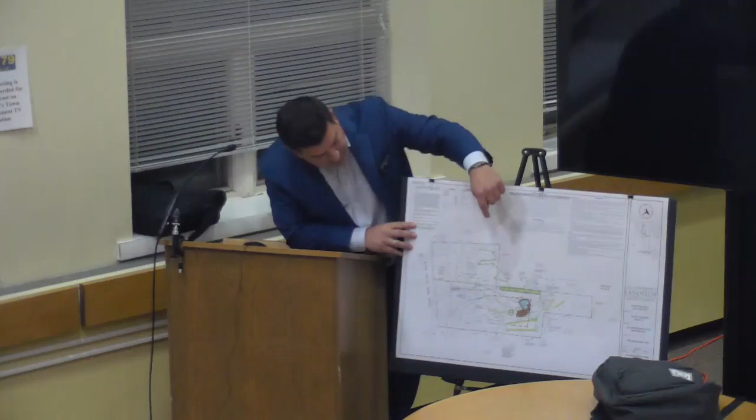So as Mr. Talamelli mentioned, this line here is the off-site wetlands. This dashed line here is the upland review area, the regulated area. Here in red, you could see that's the building setbacks. And then here in green is the existing septic. So it's a pretty robust septic system. Tank and pump chamber that gets pumped up to 4 separate galleries.

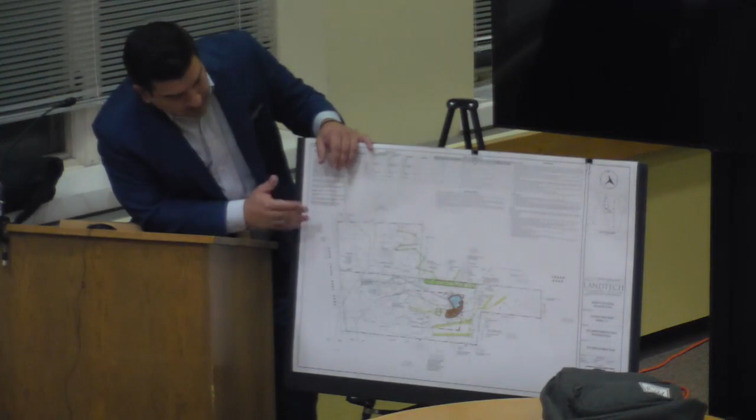So there are separating distances from septic, which is 25 feet. So this kind of is shoehorned in here, right along the building setbacks and the necessary setbacks from septic. It's a very small pool. It's a 10 by 22 pool with a spa. It's a pretty unique design, I would say.

There's a freestanding wall that kind of encircles this piece of the back edge of that pool and patio to kind of create a backdrop. It's more of an aesthetic thing. That would also allow us right behind that wall to elevate the pool equipment and kind of hide that out of sight. So just so you could see that visually.

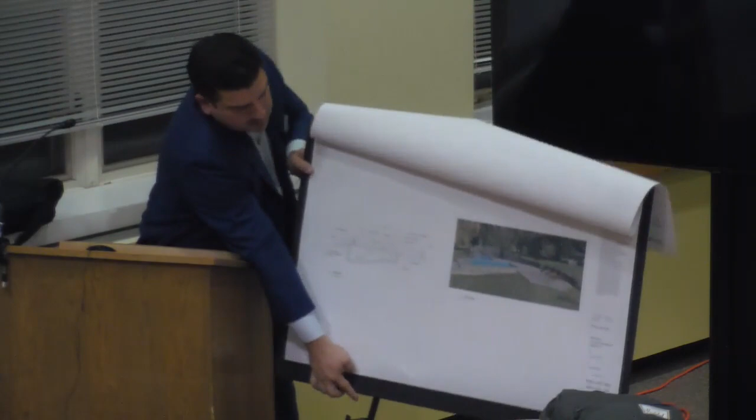There's a little rendering here that the landscape architect created. Again, pool, spa, a little water feature here, a slightly terraced patio to work with the existing grades and elevations, and again, that freestanding wall that's in the back there. It starts at 2.5 feet, and at the peak it's 5.5 feet, and it's really an aesthetic design element, but it also serves to hide that pool equipment that'll be elevated 1 foot above the base flood.

Access to the site for construction purposes. We would come off of the existing driveway. There's a little bump out here. We'd have a construction entrance. The existing drainage, which is concrete galleries, is in the vicinity that we'll traverse. We would plate that just for added protection when we come into the property. Typically concrete galleries are H20 loaded anyways, but to further protect those existing elements, we plate over that to gain access to the rear yard.

Drainage is handled by various trench drains along the patio edges, bottom of walls. You basically drain in all directions away from the pool, and we put trench drains basically around the entire perimeter to make sure we capture all that new impervious surface. That all will then get piped up here, and you can see here in blue those 6 additional concrete galleries that we're adding onto the existing system right here in the front of the house.

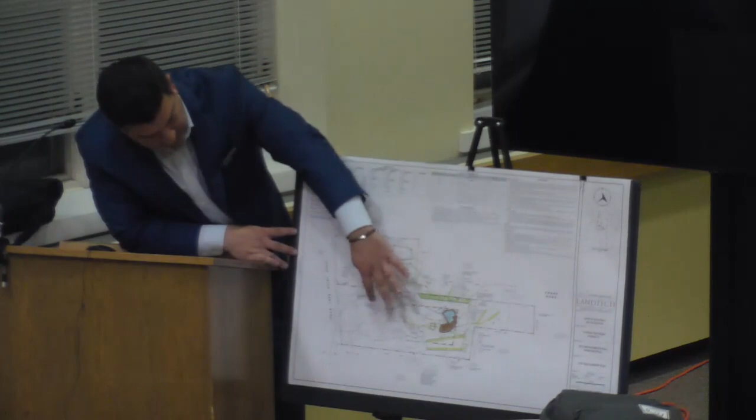All of this work is outside the regulated area, so all the water treatment, all the water handling is happening well beyond the regulated area. There is some work that's being done, obviously, within the regulated area in order to, again, what I described earlier, site the pool and its location. There really is no other location on this piece of property to site this.

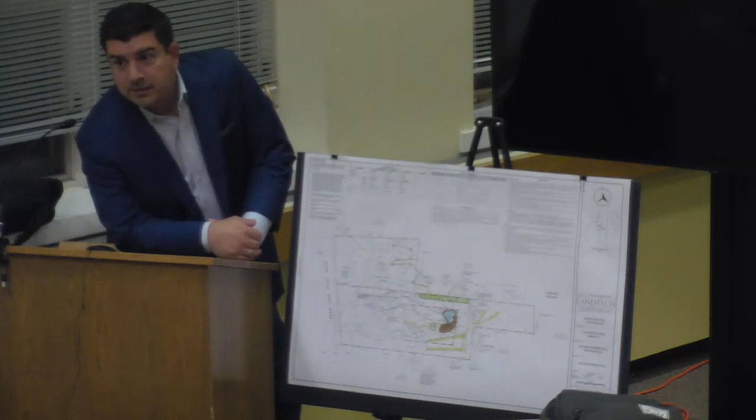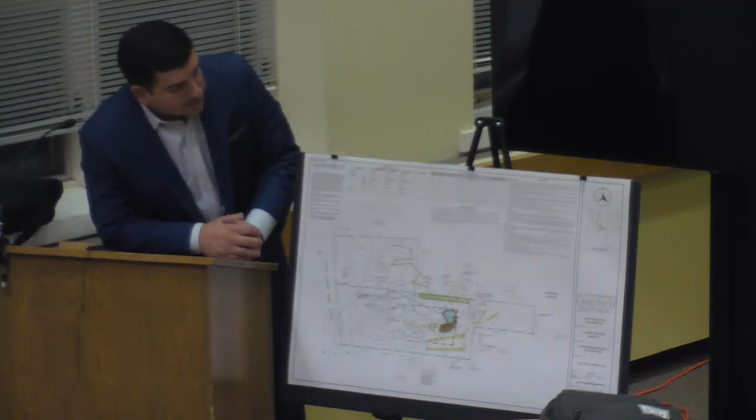And what we added here is basically a 10-foot wide buffer planting with true natives, as you guys like. I know it's kind of last minute, we originally just put in a 10-foot buffer without really calling out all the species. We then put in a plant list here of some taller shrubs and then some lower lying shrubs along that buffer. So I think we have about 31 shrubs along that buffer.

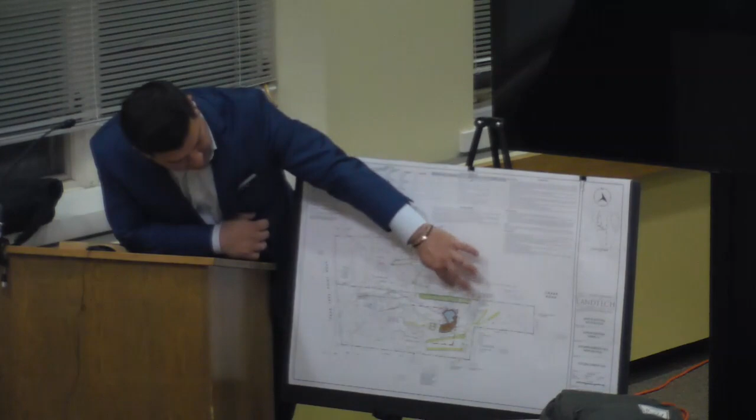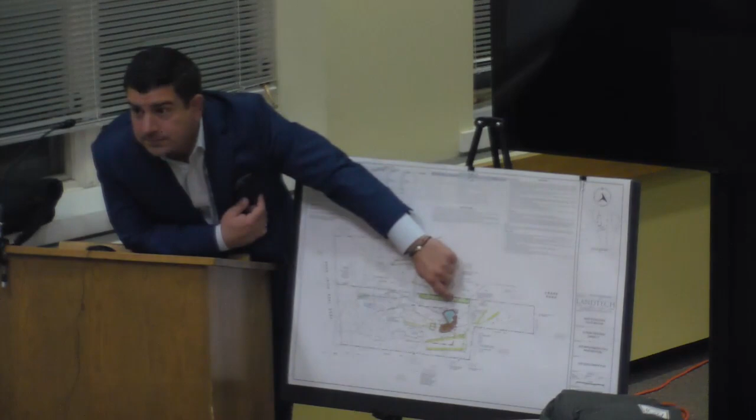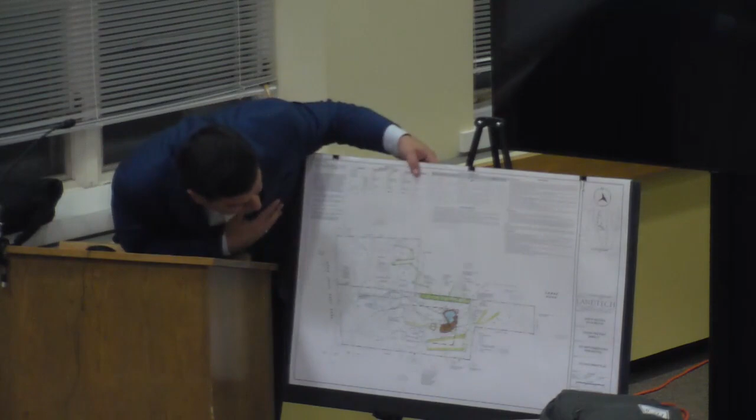This is the closest proximity to this wetlands and where our pool is, so it just makes sense. There's I think an existing willow here that we're looking to remove, and then create that planting buffer. So, again, I think they were maintaining the willow. Didn't have tree protection. Or is that a change? On the first one. That was the first plan.

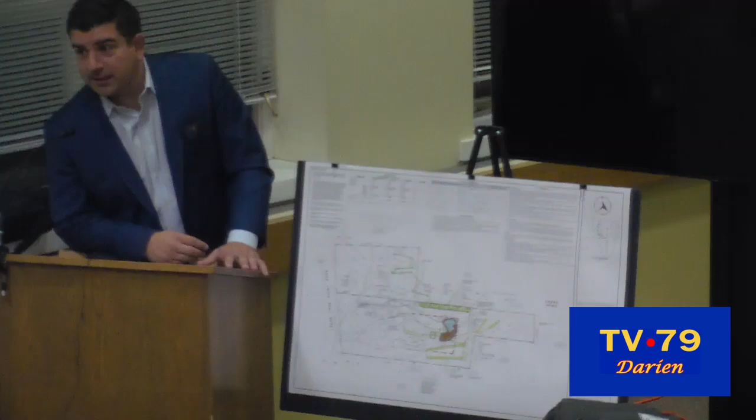The first plan, and then consulting with the LA and our environmental team, they said willows are invasive. I'm not a tree expert, but this is what I'm being told. If you want the willow to stay, I'm sure we could keep it, but they thought it doesn't have the value as a wetland planting. Again, this meets the storm requirement up to the 50-year storm, provides the necessary water quality, which is most critical adjacent to wetlands. That's pretty much it. I'm happy to answer any questions. Sure.

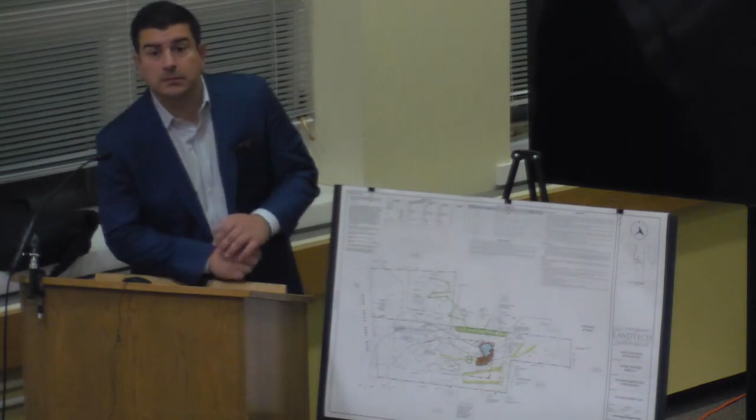Is that the existing pump chamber for the septic? Correct. Do you know approximately how close the willow tree is, I'm looking at the compass, the willow to the north of the pool? Do you know what the distance is? So our buffer is about 10 feet, and the willow's basically 10 feet off that property line.

If you're going through the whole exercise of building a new patio and a pool, I think it's more a setback issue and not a design issue. Is there a reason why you wouldn't move the pump chamber and try and bring the pool more inboard of the setback and out of the upland review area? I have a bunch of questions, but sequential questions.

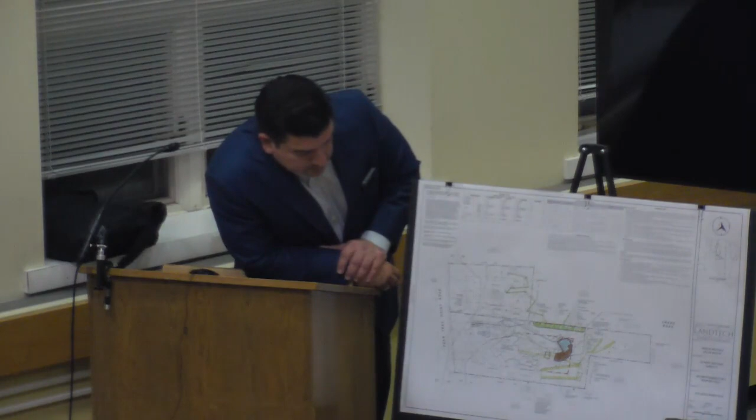So the first, just to go back, is there a reason why the pump chamber couldn't move to an alternate location? Probably not, because when you're pumping, you can kind of put a pump anywhere. Right. But the gallery is really what is also creating a pinch point there. No, I understand that. You're saying to push it closer to the house?

Further, okay, so here's the next question, looking at patterns, is wetlands flag number 1. Looking at the topography, and I haven't been to the site, I would expect that the wetlands would continue along the northerly border. Can you explain why the wetland stops the way that it's shown on the plan? Sure. So wetland flag 1 is the last field delineated wetland flag. And then we didn't continue flagging off our property.

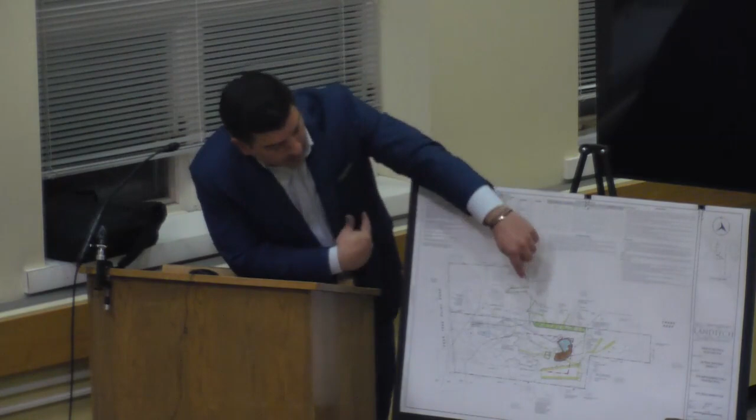No, I mean closer to the pool. Correct. So this was the last wetland flag. This was delineated in the field by a wetland soil scientist. And then there was historic mapping of wetlands in this area. The wetlands actually went just over our property line by like 5 feet. Our wetland soil scientists, when they explored, found no wetlands in that vicinity on our property. So we cut it off right at the property line.

And that's also what the GIS mapping shows. So that's where this line comes from, the town's GIS line. And it also correlates with previous wetland mappings. So the area that's shaded where the willow tree is, is that wetland? No, this is our planted buffer. I'm sorry, I used the same color, but this is a vegetated buffer. So there's no wetlands on our property anywhere.

And anecdotally, can you explain why you think that is the case? Is it topography, or is it just entirely different soils? Yeah, it's based on soil conditions. That's how they delineate where the wetlands are. Well, what I'm saying is if you have an elevated position and a depressed position, and you have wetlands abutting this area, one would quickly surmise that that's wetland, right? Right. So this area that's right on the property line is not wetland.

But I'm looking at the elevation. Can you help me out? You got a lot of stuff on this map. So I don't think we have topography off-site there.

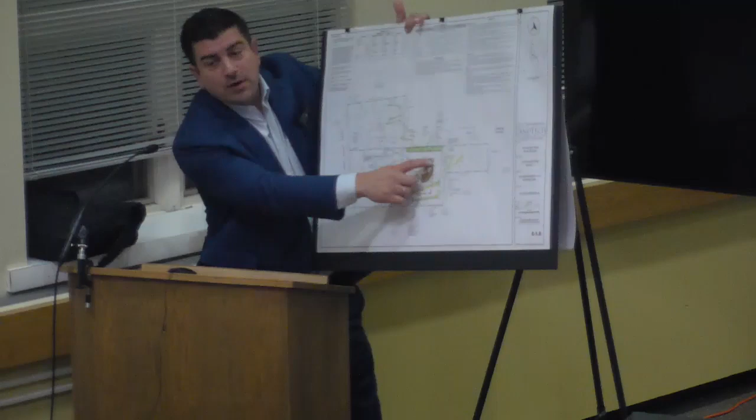Well, I think one is to relocate the pool equipment. I don't think the pool equipment needs to be located where it is on the plan. I think there's feasible alternatives. So you have to get back to us on that one. Sure, okay. We could look at that and see where we could put it. The nice part of the aesthetic design, EPC aside, was that this wall acts as the backdrop and the pool equipment is screened.

You can put it maybe somewhere in here in between these two galleries, but now it's hanging out on a pedestal in the middle of your yard. Not the most sightly thing, not in the best location, right? Well, we don't get to decide where the upland review area lives, right? Completely understand. And you guys try and make everything pretty. We're trying to balance multiple things. So I get it.

So, are there prudent feasible alternatives? Maybe the pool doesn't, right? I didn't kill you on the pool. So maybe you noodle on the location of the spa and the pool equipment, some buffer between the actual pool, so that we have more plants and less manicured lawn between the abutting wetland and the willow tree in that area. And we want to keep the willow? Of course. Okay. All right.

A quick question about the pool equipment. It's sitting on the ground? No, it's actually affixed to the wall, so there's no impact in my mind. I can provide a detail. Could you just briefly describe how it's situated? Sure. So this is the wall of the pool, the backdrop. There'll be brackets that come off of it, and the pool equipment sits on top of the brackets. Correct. So it's not on the ground?

No, it needs to be elevated. So it's basically taking up space in the upland review area, but it's not on the ground, it's not impacting it? Right, we're not pouring a concrete pad to put it in. It's affixed to the wall, cantilevered off the wall, sitting on the back of this. So there's not an impact in my mind. That does make a difference to me.

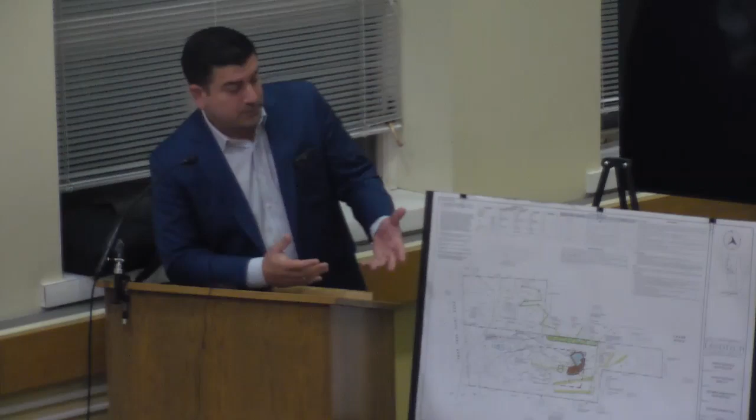We encourage our clients to look at many options, like abandoning septic and going on sewer, right? Well, that's a huge cost to this project, and I'm building a very small, very modest pool. We talk about all these elements, trust me, and then we land on something that we think we can defend and mitigate. In a pool and spa situation like this, there's not many contaminants running off a pool and spa in terms of stormwater and water quality.

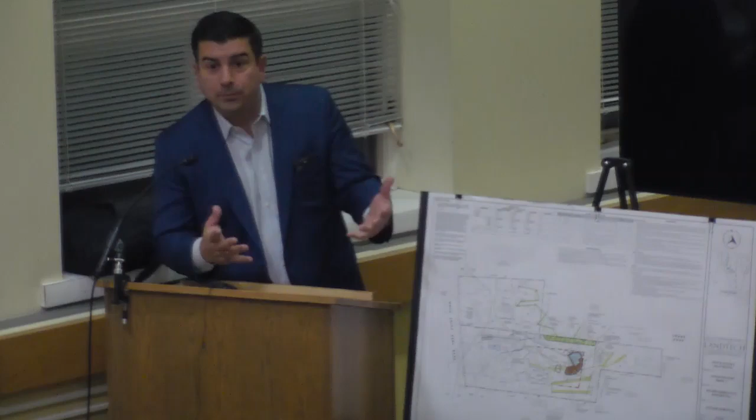You have manicured lawn right up to the wetland there. We're creating a buffer, so we're enhancing what's currently there. Could we certainly enhance the buffer more? For sure. And we could look at other options and go back to the client with all this feedback, and then make a decision on how we proceed. So we appreciate the input. Okay, thank you.

What's the sense of the commission? Peter, should we keep this application open? No, I think we can see a way forward to start drafting a resolution, in my opinion, and then incorporate some of the ideas that Mike was mentioning, also Carolyn. I think there's a route through this. It's my opinion. I agree with Peter.

Okay. My only thought is, if you want to see and have the ability to comment on the planting plan, and you want them to look at alternatives, you don't condition that away with a resolution. If you want to see it, then see it, and have them grant an extension and come back at the next meeting. If it was just the planting plan, I would say you can certainly ask staff to tweak it. But you've asked questions about the location of the spa and backwash, and there's alternatives. That's the basis for your decision making.

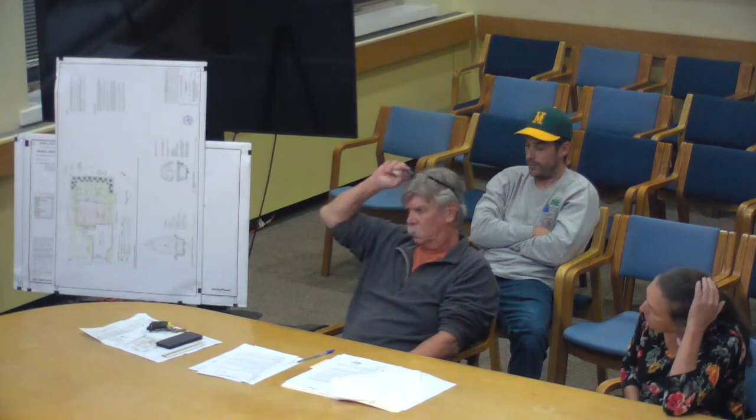Also, this morning I sent to you, we've had discussions with some of the abutters who have expressed their concern about drainage, and they have provided videos, I think you at least got some of them, showing what they experience on their property in storms of magnitude. They're, I believe, mostly to the east of this site. So I'm available for questions. The applicant's here to make a presentation. I note that the abutters are here this evening as well to express their concerns, and we can move from there.

Okay, just a point of order. The applicant's going to have a chance to speak now and present his plan. The commission members are going to have their chance to ask questions and comment and have the applicant respond. Then I'll have Joe come up and make his comments, and the applicant will be able to respond. And then I'll get to the members of the public, okay? And you'll have as much chance as you need to speak. Okay, so that'll be the order of business here.

So is the representative for the applicant here? Right here. For the record, Jay. Is there any way you could get up there and speak? Sure. Because the microphones are up there, that's the reason. Okay.

For the record, Jay Fain from Jay Fain and Associates, Environmental Consulting Services. Just a little bit of my background. I'm a professional soil scientist. I'm a certified professional in erosion and sediment control. I'm a certified ecological restoration practitioner. I've been in business and practicing for approximately 40 years.

So Rick and I are about to start at the same young age together.

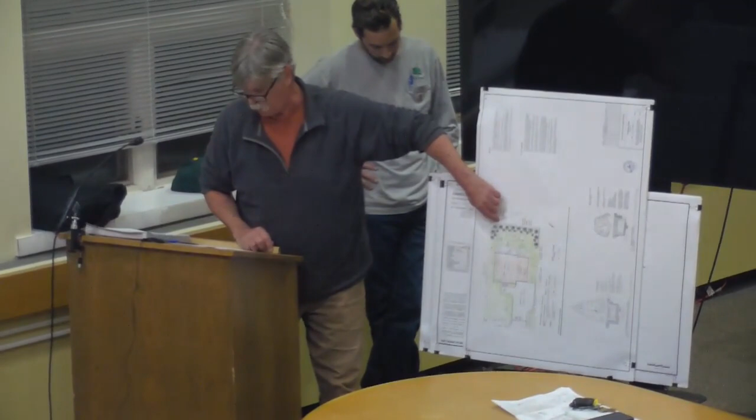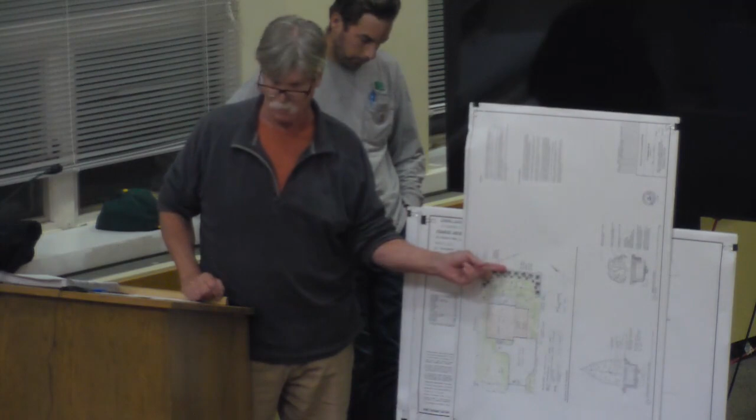The wetland in question is a watercourse that traverses the rear of the property here. It's an intermittent watercourse because it flows more than a single storm event, and it has defined banks and channel. It has evidence of scour and erosion. Really, no wetland vegetation that I noticed. It's mostly lawn, and there's invasive species associated with it. The location is approximate that I use from town GIS maps because it's off the site.

I did want to address, and Rick and I had some discussion about, the watercourse feature on the 30 Relihan property. I looked at that when I did my original delineation. It's obviously altered. I could not make a determination when I was on the property looking at it. There was no watercourse feature that I could tell. Also, I can't tell from off-site if there's wetland soils, but this area did appear to be disturbed. There is riprap placed in here, a lot of invasive type species, so I wasn't able to make a determination from the information I had from off-site whether it's a regulated area or not.

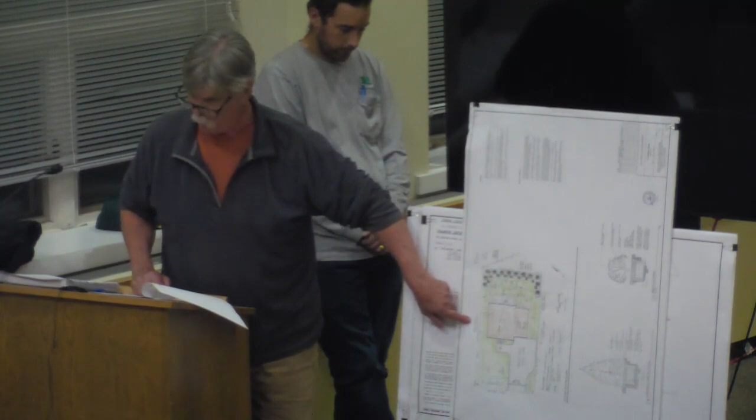I did notice that it was on your town GIS mapping, and I did go to the 30 Relihan file for it. It's interesting. It's shown as a regulated wetland and watercourse, but when I looked at it closely, there's no soil scientist report on file. There's no evidence of who determined or how they determined that this was a regulated area on this particular piece of property.

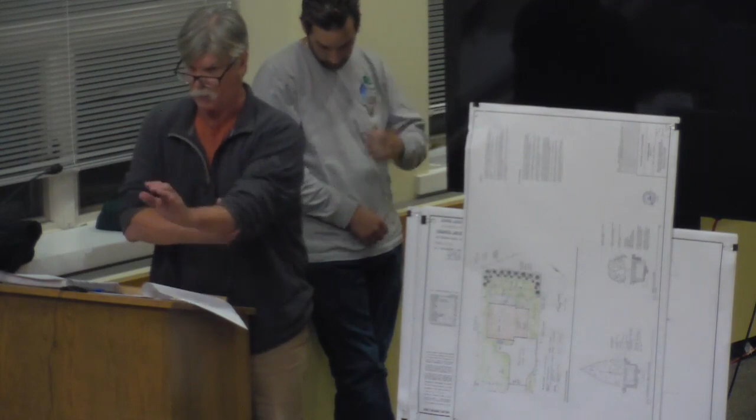Jay? Yes. Excuse me, when I walked there was a headwall, there was a pipe. It looked like most of the water was coming out of a pipe. There's definitely a drainage easement over here, and there's definitely drainage that comes across here, and I think that's the original source of the water here. And I don't think there's any dispute that it's a drainage course. And I don't even know there's a dispute that it's a regulated area. I'm just telling you that I, as a professional, can't make that determination. Okay. I don't have enough information.

And I did try, based on the information that I could ascertain, and I could not find an original soils report or anything that a professional had done. So I feel that I can't make the determination and say this is a watercourse. I feel the record needs to accurately reflect the findings that I find, and so I think it's up to the commission to make the determination whether this is a wetland or a watercourse. It does not make a difference. Regardless, we're not going to have an impact on this area here. But I'm a stickler for doing things the correct way. I want to have the record the right way in case there's any appeal or anything else.

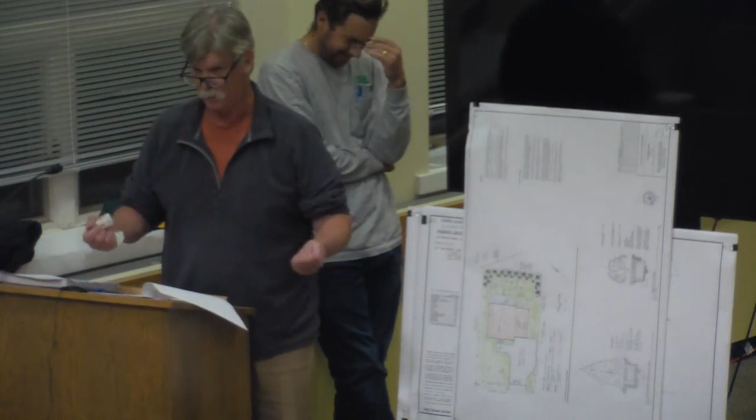So, Rick and I had a discussion about this, a little heated, but I said, let you guys make the decision. That's the right way it should be. That's the way these hearings were designed to be. I'm fine with it. Once you make a determination, we'll add it back to the plan. As I said, we're not going to have any impact on it anyways, and I felt the findings that pertain to 30 Relihan that allowed this house to be built should also be applied to this, because we're even farther away and we're going to have less impact.

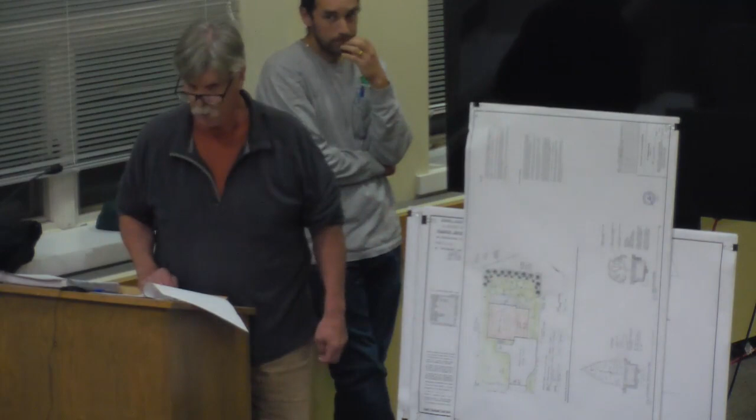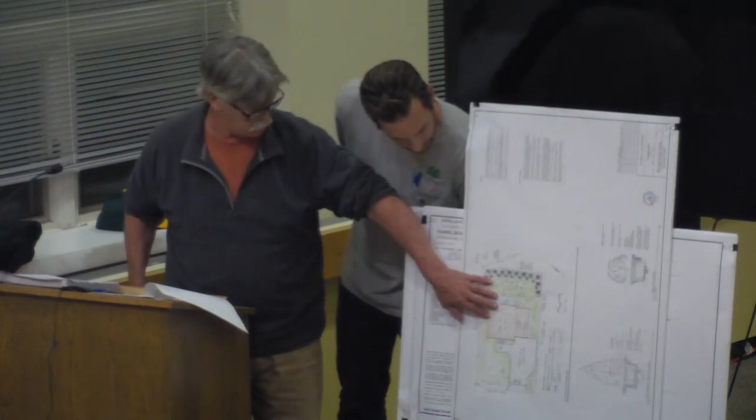Did you test the western boundary for soil along that? I tested this up here. This is what Rick calls dirt fill, what I call HTM, human transported material. Now that's kind of the updated term. It's all fill in here. And that was fairly obvious. The primary function of both these systems is stormwater conveyance. There's no real wildlife habitat value. There's no water renovation value because the water's just moving too fast through here.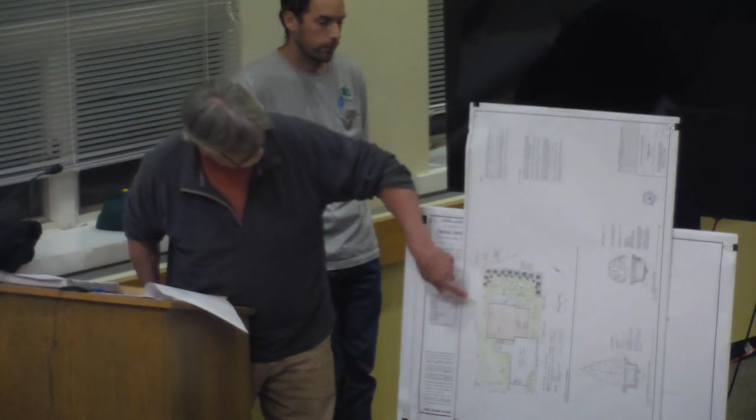I'm going to let Brian talk a little bit more about how our drainage system is designed and how that's going to renovate and improve the stormwater quality over the existing condition. But I just want to touch on that. Our philosophy is always to give back. We should always improve the situation. So we did include a planting here, and we originally used the green giant arborvitae.

The reason: we've been doing this for 40 years. We've tried everything. We tried every native conifer that we can. They don't make it anymore. The hemlocks and the white pines just can't do it anymore. We want to have a successful planting. We've had great luck with the green giant arborvitae. It's deer resistant, it's disease resistant. You can't kill them with drought. So that's why we used it.

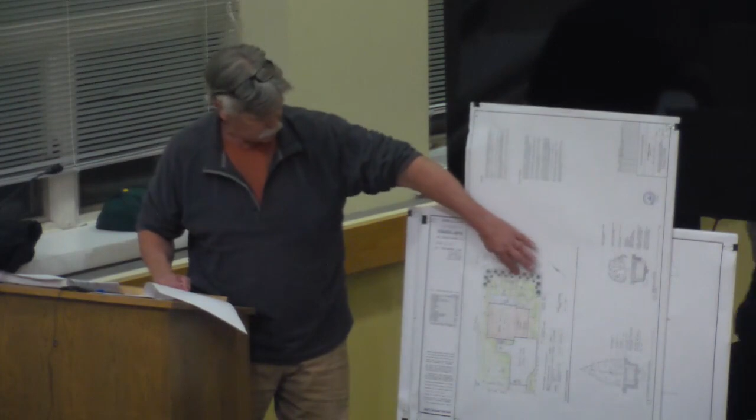It does provide cover for animals. It doesn't have any food value, but it does provide cover, similar to other evergreens. We got a comment: could we use something closer to a native? We could use whatever you want, I'm just giving you our experience. We did revise the plan and put Norway spruces here. They're not native either, but they've become indigenous. It's common, but we can have a discussion on that. We're not wed to anything, but we felt it was appropriate to have some type of evergreen buffer here, and then we used native, what was it, the clethra along the front here.

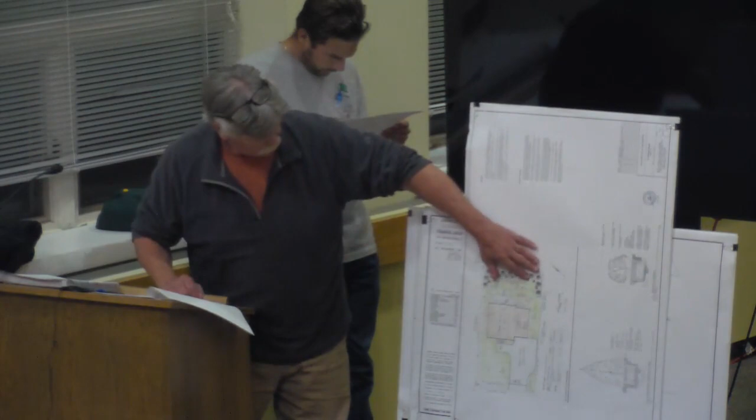Unless you have any questions for me now, I'm going to step down for Brian, because this is really a lot about drainage. I think you need to have a detailed discussion on the drainage and how that's going to be improved. And then we can digress back to any questions you have for me later on. Thank you very much.

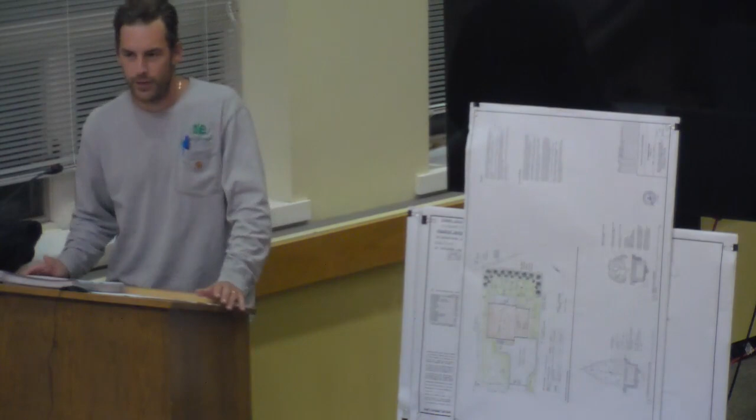Good evening, Brian Muller with Muller Engineering. I'm a licensed professional engineer in the state of Connecticut. We analyzed this site under the most current drainage regulations for the town of Darien, which is the fresh meadow approach. As Mr. Telemelli mentioned, we're increasing the impervious area on this site by approximately 700 square feet. I'm not going to say 673. It's 700 square feet; 27 square feet is de minimis. It's one of Rick's favorite words, I think, these days.

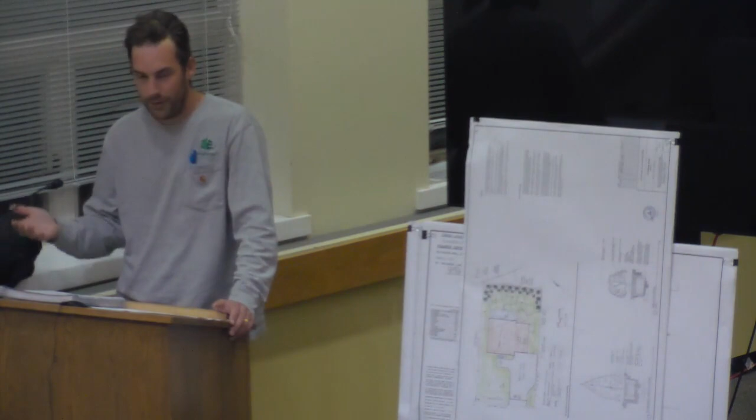But the fresh meadow approach is really a great approach. Most towns don't have that regulation besides Westport. I think that's the only other town that makes you do a fresh meadow approach. As an engineer, my vocabulary is limited, I'm good with math, but it's a good way to make up for lost time. In the past, we never required drainage systems, so by doing the fresh meadow approach, we don't take credit for those old impervious structures and paved driveways and patios. So we're making up for lost time. By that regulation, I had to analyze the site as if it was grass, not any impervious surface. And still, with the drainage structures and improvements we're making, we're reducing volumes and peak flows through the 100-year storm event. And I wanted to do that specifically here because of this intermittent watercourse.

When we were out there testing, as Jay mentioned, it was hard to determine over here, because when you look to the north property there, number 30, all you see is riprap. You see a bunch of riprap thrown in there, and I think somebody probably did that after this permit was granted and the CO was granted, to help sediment and erosion, because I'm sure this pipe flows water. I saw the videos, so it's definitely some type of conveyance for a large watershed that rips water through here when we get those 6-inch rainstorms in a couple hours, which is a big problem these days.

As you saw in North Carolina recently, they got 30 inches of rain. Towns were literally gone. And that's sadly the storm events we're coming up with now. So eventually I think the peak flow models that we run are going to change for more intense storms. Right now we run it over a 24-hour period, and a 25-year storm event for the town of Darien is 6.4 inches in 24 hours. So when you get 6 inches in 3, 4, 5 hours, that's a lot of water. And this year we've had a couple of those storms. In certain areas, it's amazing. You'll get 4 inches in Greenwich, you'll get 10 in Darien.

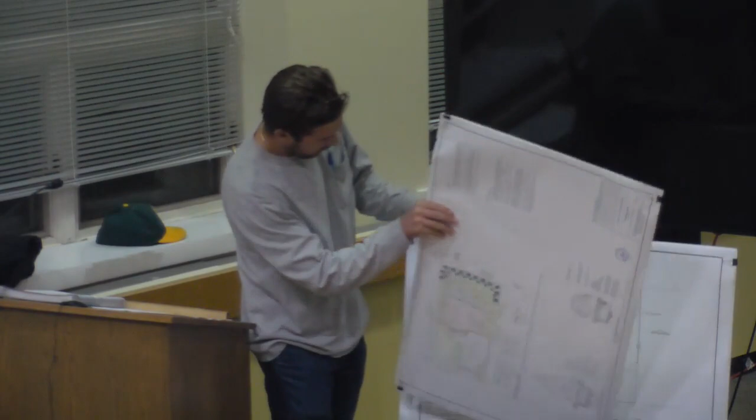So what we have right now is just 2 Cultec systems, one in the front, one in the back. The front one takes the driveway, and the back one takes the back portion of the house. So the majority of the house goes into the back, and the whole driveway goes into the trench drain here. So we'll capture the whole driveway. There's curbing on the driveway. And then we did, just as a precautionary thing, because when we dug test holes, we didn't witness any actual groundwater in the holes.

How deep did you go? We went about 9 feet, actually, in the test hole. I think I only recorded like 7 feet down because the basement's only 5 feet into grade. We also tried to keep the first floor as elevated as we could, so we only had to excavate 5 feet.

Are you putting mechanicals down there? Not that I know of. Not in the basement? Not that I know they're putting mechanicals down there. So what's gonna be down there, then? I'm sure they'll have a hot water heater down there. I'm sure that's probably where they're gonna put it. That's where I would put it if I was building the house. But I didn't see a labeled mechanical room on the foundation plan. It was just a basic foundation plan, open floor plan down there in the basement. Since you have it, you have sump pumps, et cetera?

Yeah, there'll be a sump pump inside the basement, so it'll be different than 30, where they have 2 exterior pumps, and on 30 those exterior pumps just go to a level spreader, so there's no real storage there. So when those pumps go off, they're basically just gonna flow right into this intermittent water course. We have 2 330 Cultec systems there that'll store 100 cubic feet of water each, and also provide infiltration, which is another thing in our drainage model we don't account for.

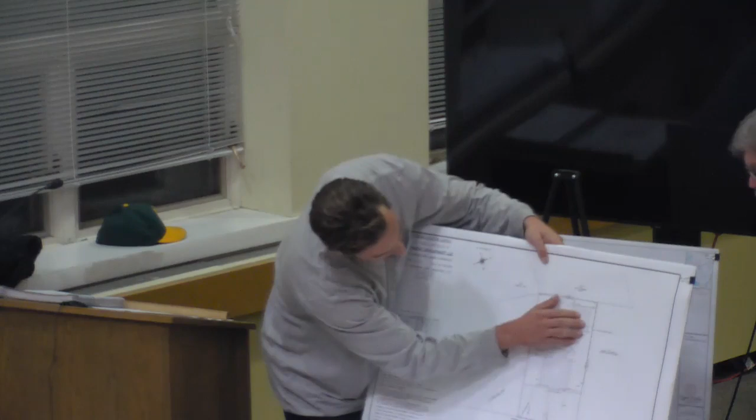There was a big detached garage about 6 feet off the back property line. The driveway went all the way back there. All this water from the high point right across the middle here went untreated down into the wetland area in the back. So now it's all going to be treated. There were minor comments from the outside reviewer, Joe. Actually probably some of the best comments I think I've ever had.

The first comment is prepare a stormwater maintenance and operations plan. And I think that comment was because he probably reviewed the first set of plans. On the second set, we have the operation and maintenance plan right here. If he wants a different type, we could do that. I do paper 8.5 by 11 documents that I like to give the homeowner because after the house is built, these maps are gone. So a little packet goes a long way. I can also provide a packet for environmentally friendly lawn care too. We do that in some towns to help tell homeowners how you can treat your lawn and get a green grass without putting Roundup on it.

One of the other comments was asking me if I investigated this easement to make sure that there were no pipes that cross underneath the property, and we did. We dug test holes right here in the line of it. We also looked at it, and it's very obvious there's a pipe that comes out. My assumption is during the process of this subdivision, they tried to run a pipe through here, and someone cheaped out and said, let's just pop it out right here and let it rip. Back when this subdivision was done, that was probably normal practice. We also didn't have heavy, intense rains back then either.

And then one of the other comments was just bringing up the groundwater thing and the sump pumps, and it says no response is required. And then the last comment was, provide inspection ports on the Cultec, and yeah, I definitely need to do that because that's an important aspect of maintaining the Cultec system. Usually I'm pretty good about that. That one slipped by me this time. So we will add those, and hopefully that addresses his comments. If there's any additional, we'll address those too.

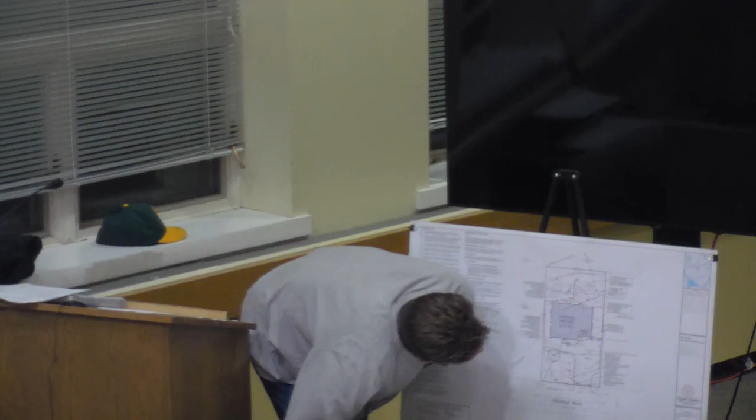The driveway is very flat. I've actually discussed with the homeowner about making it a porous asphalt driveway or some type of porous material as just an additional measure. But I wasn't gonna include that in my drainage model because I don't need to. With the driveway pitched so minimally, he will get ponding. I don't know an asphalt guy that'll pitch it that perfectly. You'll always get some ponding, and then his driveway will really degrade quickly. Instead of a 15-year driveway, it'll probably be a 5-year driveway.

But that's something this owner has actually done in the past. I've worked with him in the past. We've done a lot of porous asphalt driveways, Gravelpave2 driveways, paver driveways, a mix of the group of 3. Sometimes they'll do the parking spot as pavers, an apron in front as pavers, and then the rest porous asphalt or gravel. When we do a gravel driveway, if you Google Gravelpave2, they'll give you all these, it's like a newfound design. So it's not like you're going down to the Jersey Shore, driving a gravel driveway and you see all the tire ruts, right?

It puts down this hexagonal structural piece in the top 4 inches of gravel that gives a structural aspect to the gravel, so that you can actually plow it and not make a mess, and not plow gravel all over the place and have a large cleanup. And that's actually implemented at the town of Greenwich. If you do a gravel driveway, you have to do that.

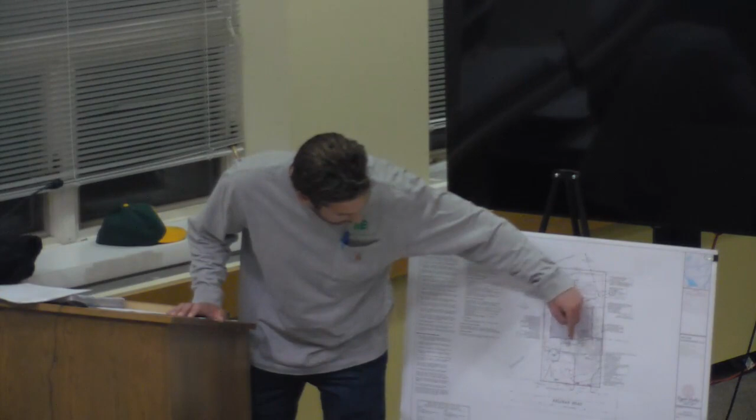So it's certainly a benefit to the abutting neighbors because you haven't increased the grade. Oh, yeah, and I purposely did that because I know there's specific rules on grading near the property lines in town. The original design of this actually had the house further forward with no parking spot here. But when we spoke with zoning, and I didn't know this until now, there's a code apparently that you have to provide at least a 2-car garage or an additional parking spot.

And they wouldn't let me count the parking spot here as an additional parking spot because it's within the setback. So we had to provide a parking spot so that 2 cars could park outside the setback, which I thought was an interesting regulation.

So that's how we came up with what we came up with. Originally, we had this whole thing forward another 10 feet, but we added that spot in there. And then my last question is, I know you engineers design everything. Would it be belt and suspenders if you took the front left gutter leader and, I don't know, if you just put 2 more Cultecs where the driveway Cultecs are? It's just a question if that would be meaningful or not.

I know just for the commissioners, Mr. Devanzo, if we ever looked at all of his plans when he was presenting applications that had upland review area review, he would always grab a corner of the building and just put 2 Cultecs to take some additional runoff, which is like the nice to have. So that's my question: is it prudent or is it just a nice to have, is it eyewash?

Well, here's another point, just forget that I even asked the question: that's the area where the abutting neighbor has the scour from the pipe, so you don't necessarily want to add more water. You're doing them a favor by not adding infiltration in that front yard area. Yeah, exactly. I was trying to maintain a natural grade over here as well, even though it is deemed as fill by the soil scientists. It was still placed there 50 years ago, so to me now it's natural, it's older than me.

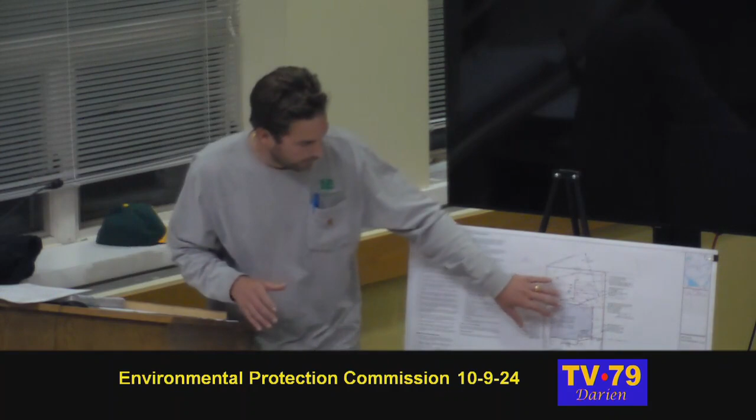But I did think that I could always shift these Cultecs over too, to eliminate any excavation as close to this wetland area as possible. But I like to keep a 10-foot separation between different Cultec systems because they tend to mix. And if one is groundwater and one is stormwater, you like to keep those separate. And that actually gives me another idea.

A lot of people are always worried about sump pumps and the impacts on brooks and watercourses and town pipes and things, right? So in a normal situation, when you're actually pumping groundwater, your sump pump should go off days after the storm because it takes time for that rainwater to absorb down into the groundwater level. I tell people this all the time because I get calls after a big rain: I got 3 feet of water in my basement, it's never happened before, or my sump pumps were going off all night during the rain.

And usually what I tell people is if your sump pumps are going off more than normal during a rain event, you have problems around your foundation, where stormwater is infiltrating down into your footing drains faster than it should. Most of the time that's either somebody's patio that's settled along the foundation and it's back pitched a little bit, or you get some puddling, or your gutters are clogged and overflowing right next to the foundation, adding water that goes down into your footing drains.

So a lot of times a normal groundwater system with a pump should be pumping a day or two after the rain event, which in normal situations, after this intermittent watercourse flows like crazy during a 6-inch rainstorm, the pump shouldn't really kick on until the next day when this water's already starting to recede.

So typically, I've actually had arguments with DEP when I did work along the Delaware River. Delaware River peaks like 5 days after a rain event in certain areas. So they actually let us just provide water quality storage so that we could get the water out before the flooding actually happened to the peak of the river. So I thought that was interesting because we provided a lot of storage and he said, no, I only want you to provide this much. And he explained that to me and it makes a lot of sense. You want to get the water out to the river, down to the ocean before it peaks because you're just then affecting that flow, right?

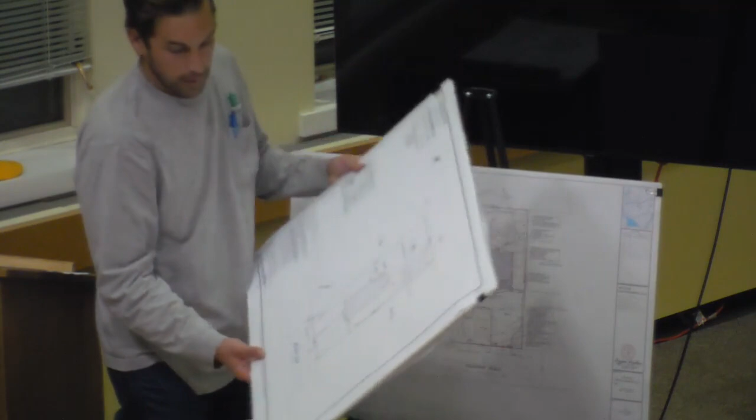So on this survey, basically, when this water flows down here, it all just flows right there. It didn't go this way, it didn't go along the well, garage. Yeah, that's how I would see it. So if that's the case, then why is the big Cultec on the right side and the small one on the left side? And why is your drain not at the low point? So I'm gonna hold those questions until we have the neighbor talk about what they see. Okay. Yeah. I can answer that really quick.

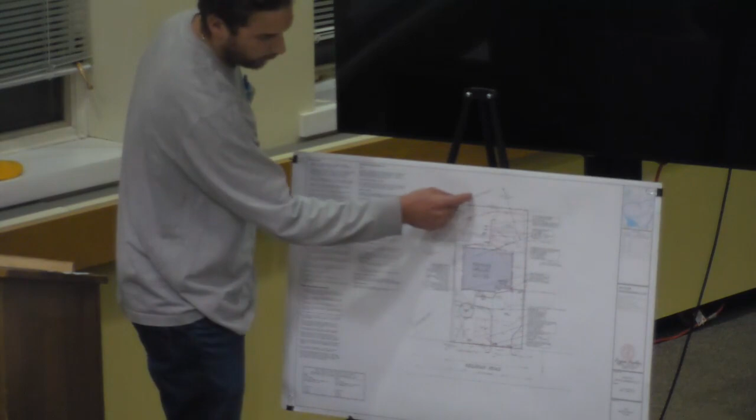Sure. So the reason why we wanted the Cultec, at least the one that I think will overflow during a rain event, as far from this low area as possible, is because then when it overflows from this standpipe, it gives it more chance to flow over land in a sheet flow manner. And ideally, that gives it one last chance to try to infiltrate the ground. It also will slow it down. If I put this right over here, then immediately the water that overflowed out of there, if it ever did, would then be right in that watercourse with that heavy flow potentially, depending on the rain event. So the further away I can get from a point of concern, the better. It allows the water to sheet flow over land.

Just like if you have a steep property and once that water hits that top ridge, it's gonna start to rip down the hill. You can actually extend the time of concentration by leveling it out and building a wall, and you'll actually reduce the flow of water to that bottom of the hill by leveling it out, because then it flows over a smaller pitch and it takes more time for it to hit that point of concern.

I don't know if that makes sense. Okay, I might go through that again another time. That's fine, that's fine. Okay, I'm gonna go through it again. I'll pass it on.

This is the most informative presentation I've heard in many, many moons on this commission from all of the presenters. Michael's good questions. I have nothing to add. I'm thrilled with the education I'm getting tonight.

I apologize for asking you to repeat, but could you just repeat? I was looking for a document here, and I kind of tuned in as you were talking, but I missed what you said initially. The driveway is constructed of? Asphalt, as of right now, it's just a normal asphalt driveway. Because you were talking about the stone driveways. Yeah, so knowing this builder, it could change over time. They build it, and then they're gonna list it, and depending on the new homeowner, they may want a different type of surface treatment.

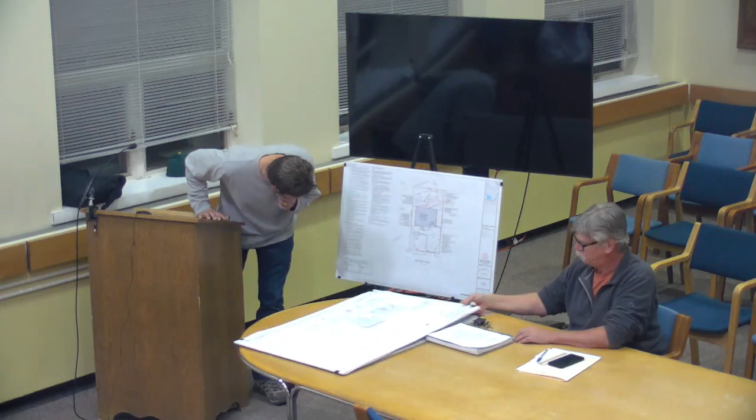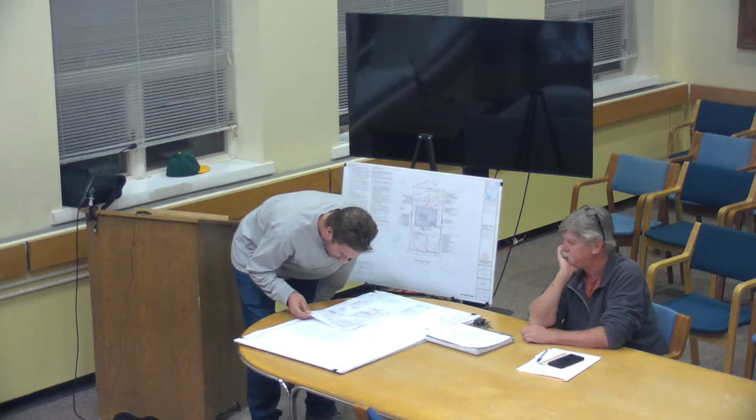It might have been on the... That's the 30 row property, yeah. Oh, those are the neighbors, okay. Yeah, from 2017. All right, so there is a full basement, correct? Yes. And how tall is the basement, how deep? Let's see here. 8 feet. Yeah, it's like 8.5 feet.

And so getting back to the sump pumps, is there a sump pump in the, I know the house is kind of... It'll be inside the basement, which will be different from the neighbors. So the neighbors, they actually have a detail here on this plan on file. It actually shows the sump pump to be 2 feet below the bottom of the footing, which is very deep.

A lot of times, when we do these types of designs with exterior sump pumps, I usually have contractors put those in as soon as the foundation goes in the ground, so I can monitor the level of the pump, and we can adjust it based on how much it's pumping. Because honestly, by raising it 6 inches, it might pump half the time, and you're still 1.5 feet below your footings. You don't need to be that low. You only need to be 1 foot below your footing, really. So that could be something that could always be adjusted on properties in the future.

So just out of curiosity, if you're recalibrating the sump pump to minimize how often it's running, why have separate detention for it? I don't like to mix stormwater and groundwater, because sometimes the groundwater will be pumping at a different time. If you get a big rain event, and 2 days later your water's all down into the footings, and it's starting to pump a lot, and then it starts to rain again, you don't want the pump pumping into a system that's also gonna take rainwater, because it'll already be full. So I like to keep them separate, and a good 10 feet apart.

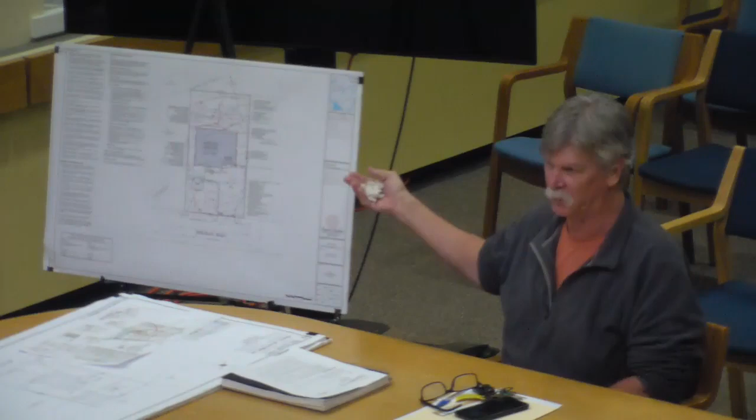Yeah, I hear you, and there's different philosophies on that. That's my expertise and my passion, invasive species control and removal and environmental restoration. So I don't want to get into the whole spiel, but we can do mechanical here. The only issue with mechanical is you can't just take it and dump it, so you have to be careful. We'll have to address that during the process. But basically, there's nothing there we're saving.

We'll just scour, take everything away, and then bring new soil in. The only problem is there are absolutely invasive species on the surrounding properties, and if you know anything about them, we're going to be challenged with them in the future. We can't go on the neighboring property.

Right, and some of them, I don't know exactly which ones are there right now. But the worst one is the knotweed. Yeah, knotweed, and that's just nasty. So we'll take whatever we can on our property. We'll encourage the neighbors to take theirs away.

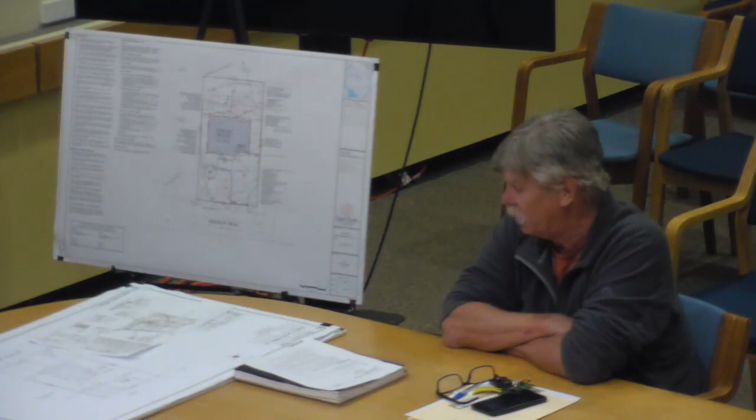Yeah, I was gonna say similarly with giving homeowners a plan or a suggestion to practice organic land care. Maybe if you give the neighbors some literature about the invasives, they would be willing to. Yeah, and like I said, we try to use native species. I'd like to get your input on that.

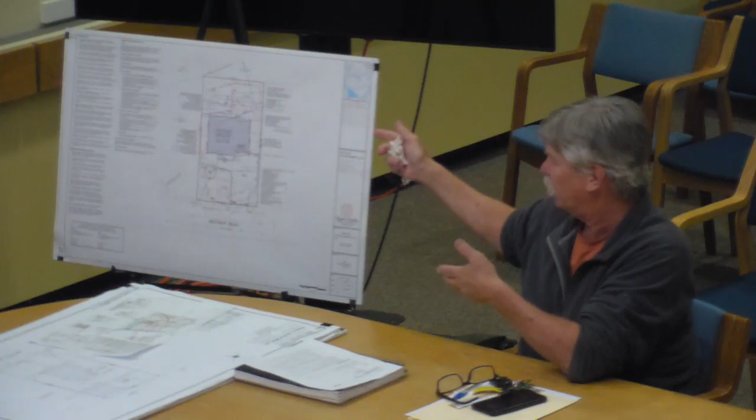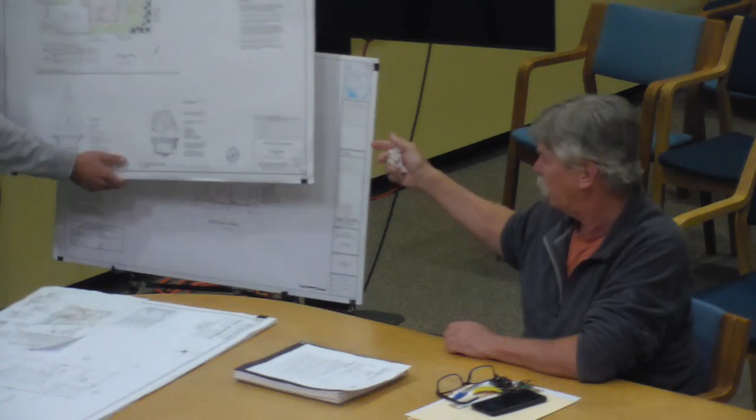We always, wherever we can, use pollinator plants and native species, and we don't even just use natives. We use the native genotype, not the cultivars. Right, the straight natives. And then for the lawn, we never use bluegrass lawns anymore. We use only the tall fescue grasses. It's low everything, low water, low maintenance; once they're established, you don't need to do much to them at all.

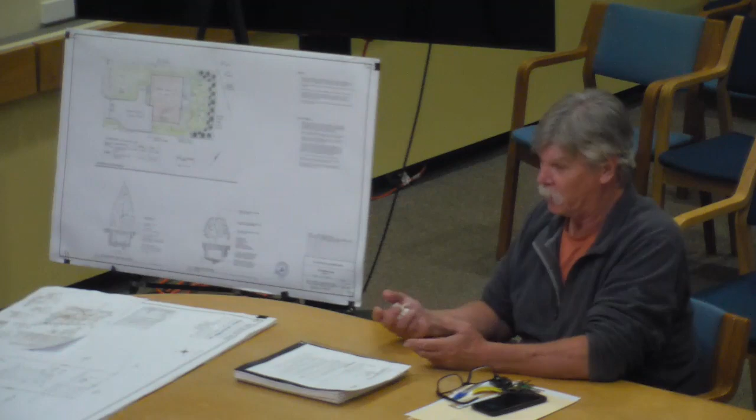So that's a native seed? Yeah, it's a native grass, it's tall fescue, it's a clumping grass. I can give you information about it if you want, but it's so much better than the other grasses. It's tolerant of compaction and everything else, so we always encourage everybody to use that. If you're gonna have lawn, that's the seed you should be using, and we can give you more information. Yeah, I'd like to read more about that.

And about the suggested plantings, the wetland restoration plan. I'm not a huge fan of the green giant because they're not native. We hear you, but we can't use the hemlocks anymore. They're just not gonna make it, and no one's gonna spray for the adelgid. They're just gonna die. The white pines are pretty similar, they just don't seem to make it.

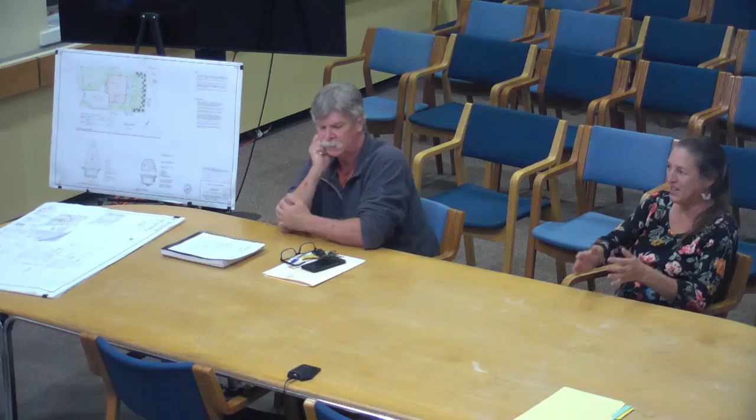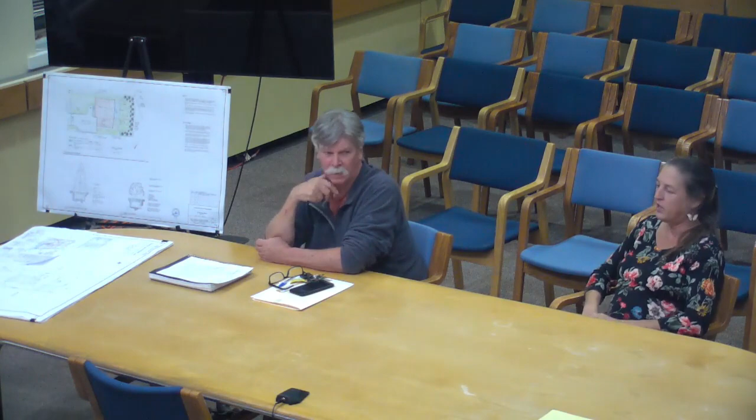Arborvitae, or the deer. I'd like to use the occidentalis. I default to the plicatas because at least they're in the US. Well, apparently it is a cultivar from a native and a non-native. Yeah, it's a hybrid. But the functions it's serving are similar to the occidentalis, the cover, the same kind of little cones, and the deer resistance is its special power, being fragrant.

But do they only browse on it in the wintertime? The native arborvitaes, they eat them year-round, it depends on the herd. Because I anticipated that we might have this discussion, I looked at the NOFA guidelines, and they suggested that you might be able to head that off in the winter, when the deer are more likely to browse on them, with sprays and netting.

Yeah, the netting and the tarp. People just don't tend to do it, and so you end up seeing them looking like Q-tips, because they've been eating them six foot tall. We've been doing this 40 years, and we tried every evergreen, we've used Douglas firs. The deer's gonna eat. The blue spruce get a fungus, they're no good.

So the good thing about the green giants is they're gonna live, and they're very hardy. There is a new variety that doesn't grow so tall and rapid, so we try to use that. You put them in and forget about them; they don't have to be watered or deer-proofed, no disease gets them. Most of these homeowners aren't gonna go out there and deer spray them, so in a situation like this we think it's necessary. And you have to have that kind of screening there, it can't be a different type of tree?

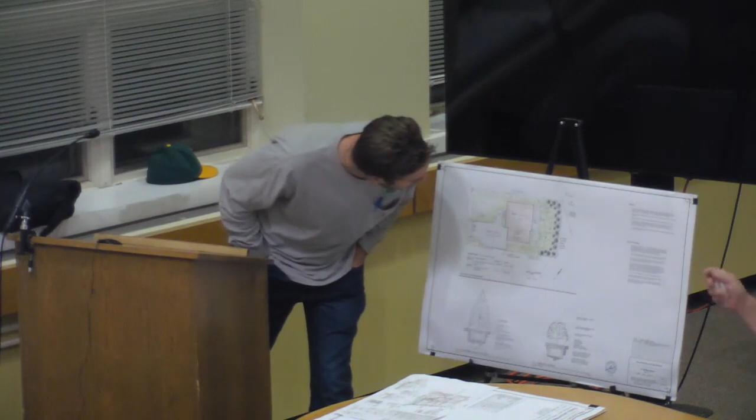We're 100% with that, but where Jay's coming from is if there is a major erosion here during heavy rain events, the root systems of these trees will help prevent that. They're a good buffer planting, they'll act for water quality, because they have a good, robust root system. So this whole back area is designed with a bunch of different functions. It's native planting, there's flowers for pollinators, there's cover for birds and some other wildlife, and it's also a vegetative buffer strip for water quality improvement.

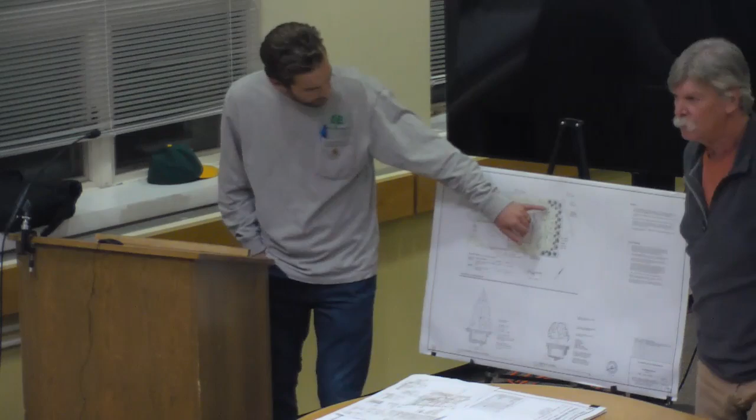So can I just move on to the next one? The other plant that you mentioned, I may be mistaken, but is that a cultivar? The rosea is a selection. So it occurs naturally, but they have to select it and then continue it. Okay. So this is like a specialty, just to make it nice. I'm gonna defer to you on this, but my point is that I always want to see straight native plants, because I think they're more ecologically beneficial to the property.

Native plants, one of the benefits is that they require less water. You're preaching to the choir. We're 100% with it. There's so many reasons. I grow them side by side. The pink grows great as well, it keeps its growing capacities, but I'm fine to go back to white.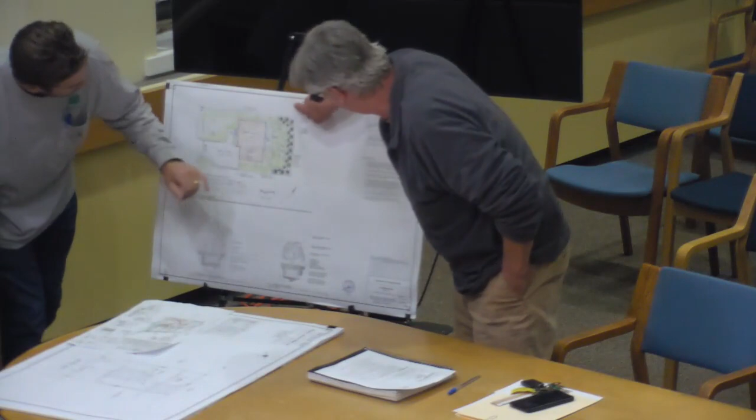Okay, so the last thing is that buffer planting. Since there is the outlet where the water flows over the land into the ditch on the neighboring property, would it be helpful to make it a little more robust? I can't really tell how wide that side is. Maybe it is more robust than I'm thinking. There's no concentrated flow on our property at all. The concentrated flow is here and over here. She's asking how wide is it? Is it wide enough to sufficiently handle water running over it?

No, what I'm asking is, didn't you just say that the Cultecs, when they fill up, they flow out over here? Don't we want to create as much buffer as possible for the neighbors? Yeah. So Jay actually did a good job.

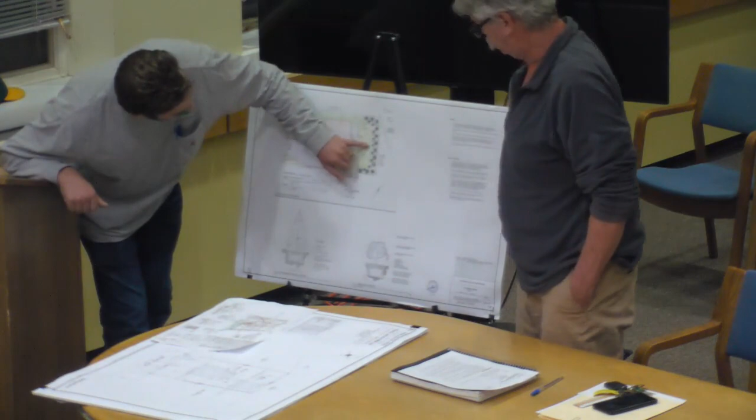We want it to spread out and move slowly. That would be designed through here so that it would help infiltrate, and that'll help with the water quality. It's like a natural vegetative buffer strip. And then lastly, one thing that we often ask in a situation like this is to put a demarcation feature so that the lawn doesn't creep into that.

We could do boulders if you want. What do you prefer, the little posts or boulders? Well, sometimes we do split rail fence, sometimes we do the boulder demarcation. I think the boulders would look natural here, and discourage the lawn from creeping. I like the boulders. I think the fence would be harder to maintain.

I used to live around the corner from Relihan, so I know the property and the neighborhood really well. And all of Relihan is fill. I could tell you stories.

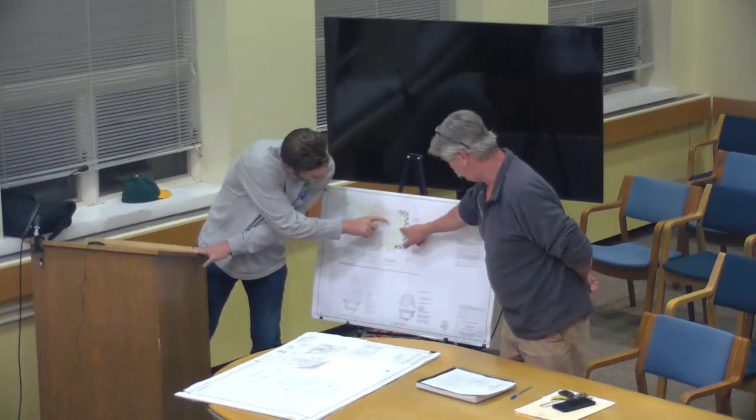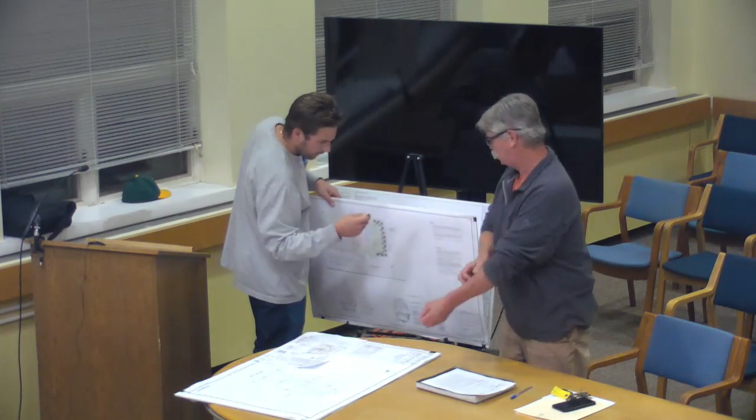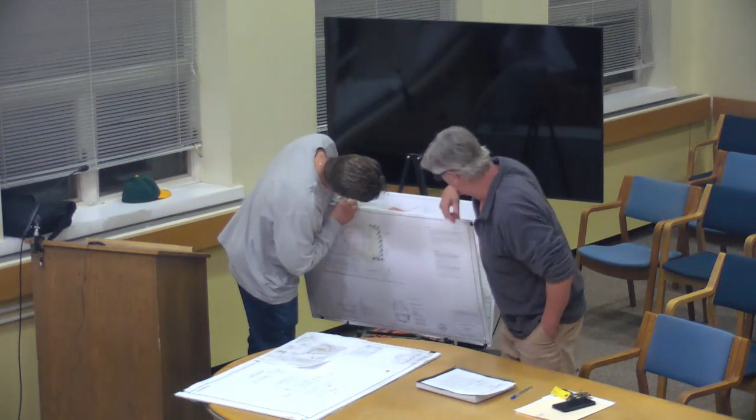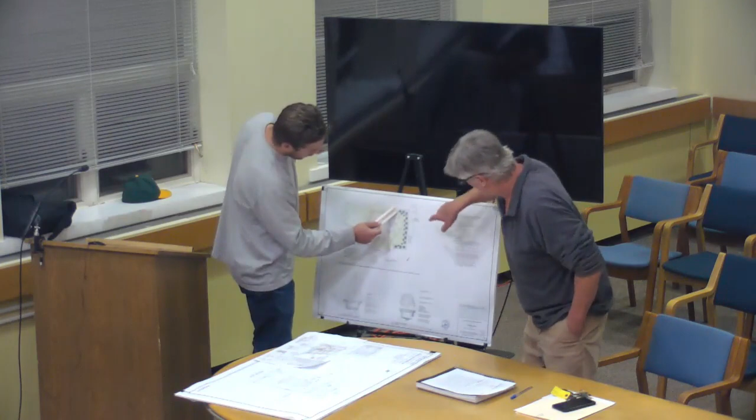What is the distance from the arborvitae to the back of that deck? Here? No, like if I'm on the back deck looking out. Oh, from the patio to the arborvitaes? Yes, sorry, not the deck, but the patio. It's approximately 20 feet here. And where would you put boulders? Right at the edge of the planting, integrated into the planting, so it's plantings and boulders.

I don't want to belabor my fellow commissioners. I think the arborvitae... no privet. Privet's a really nasty plant. I'm saying as a feature, looking at a green wall is very pleasant, people like that. I have arborvitae on my property, and I have a water condition, and I know that they serve as a buffer. I find that pleasing. I think with natives in front of it is great.

Once the arborvitae grow in, you can't even walk through them. So I think to have the boulders would be duplicative, and any future homeowner is going to want a little bit of a backyard for kids to run around in. I know we like demarcation and boulders when we put pools in upland review areas, but I don't think it's gonna be a problem, because it's gonna be integrated into the bed line here.

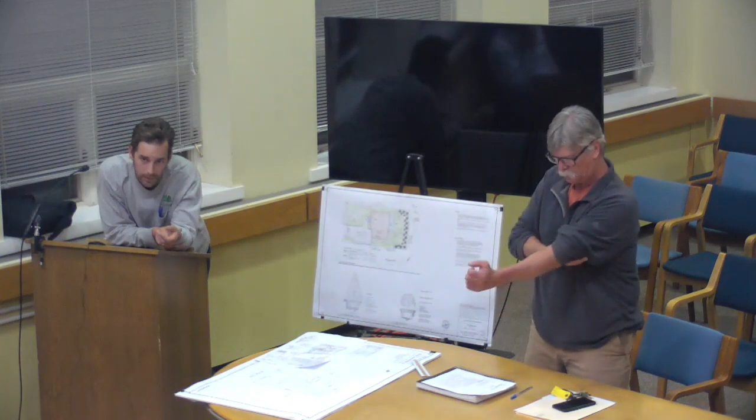Rick, if we approve this application the way it is, there's a buffer of the arborvitae, and using Caroline's example, technically it's a regulated activity to remove all the trees, right? Just arbitrarily going in the backyard and cutting the trees down. Well, people do it all the time. But that would be a violation then, I think, is what you're asking. Yeah, I think there's a balance. Well, I think then it would have to be boulders.

We file the thing with the... I think it has to be on the resolution. Yeah, we file it on the land records, that there are native landscape elements that are an integral part of the approval process for this, and they must be maintained.

Okay, all I'm saying is I think there's a time and a place for boulders, and I don't think boulders are necessary on this application. Well, not huge, like sunken, you know. Just a demarcation. Just big enough that the lawn guys can't pick it up and move it. Basically, we call them lawnmower boulders: two men can pick them up, but one man can't.

Okay, all right. And I think it's probably a nice feature. I'm not married to this, thank you. That's all. All right. Thank goodness. Nice rocks.

Almost every commission asks for that these days. We're very used to it. We've approved it on a lot of different applications. I like using boulders as a demarcation. I'm not a fan of it. I'm just saying, when you have an expansive lawn, and this big lawn property is an upland review area, I agree, a split rail fence, a boulder. When you have 20 feet by like 40 feet of lawn, that's where I was coming from.

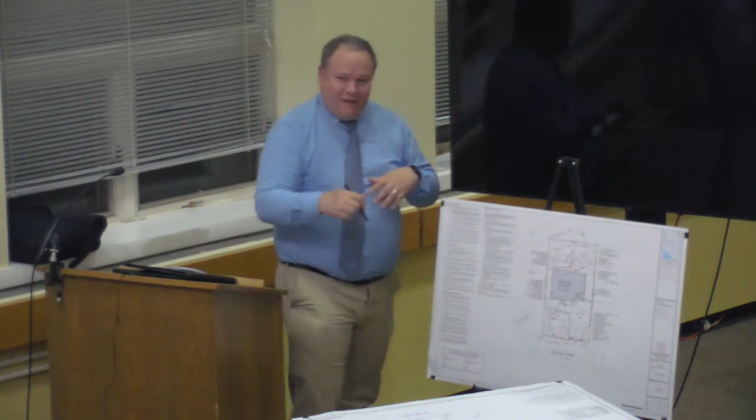And the backyard here is only so wide, right? So you want to maintain the separation from the neighboring property, because you have to excavate for these systems. You also need to keep separation between the two systems, so they're not draining into each other.

And then the other thing is you also have to take a look at the orientation of the long axis of the chambers, because you want them generally parallel to the contours. So that's why, for example, you couldn't flip one of these 90 degrees to try to get more room and more space between them. Right. You're also limited by the actual contour lines themselves.

Right. So in your professional opinion, the location and also the volume and sizing of the current proposed plan has optimized the drainage situation? Correct. Yeah, the chambers are certainly sized, and they more than meet the town's requirements. Thank you. Sure. Any other commissioner have questions or comments for Joe? No. Thank you, Joe. Okay, thank you.

Okay, now we'll open up to members of the public. I ask that when you come up to the podium, please identify yourself and your address. Hello, good evening. I'm Lorraine Galino. I live at 71 Du Bois Street. I'm the property directly behind the new construction. Could you spot on that map where your property might be located?

Right here. Thank you. If I could just say, the brook that they talked about actually was completely bone dry after the Forge project was done by the town. So it was no longer a running brook. It was pretty much empty unless there was a significant rain. During the summer, it was dry. Even many times during the year, it was dry.

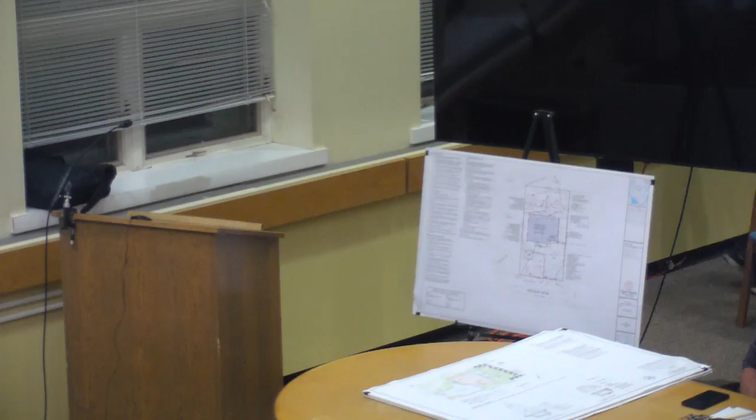Brian, do you want to talk to that? So what I'm trying to get at is if there's displacement from groundwater, and I know you've done the testings, if there is displacement compared to the current situation, how much larger, deeper will the proposed basement be?

So the proposed basement is actually at the same elevation as the existing basement. And the existing basement's only 7-foot ceiling height. What we did was we raised up the first floor of the house to match that basement elevation because there was no sump pump down there, and I didn't see any evidence in the test holes. Now again, with the test holes, you could tell the soil had been messed with.

It still looked decently virgin to me because it could be 50, 60 years old. But I purposely looked at the old house to make sure that I wasn't going to go any deeper. And the fact that they didn't have a sump pump made me feel more comfortable showing a basement. Because I've done a lot of houses where builders want a basement and I say no, and we do a slab on grade or a crawl space.

Because groundwater is a big thing for me, especially if you don't have a certain slope and you're not pumping out and it's flowing overland to another lawn area. A lot of times we have issues in town where it'll pump out and it'll flow into the road. And in the wintertime, when the groundwater is the highest, it'll be overflowing the most and it causes an icing condition. And it's a safety issue for cars, pedestrians, everything.

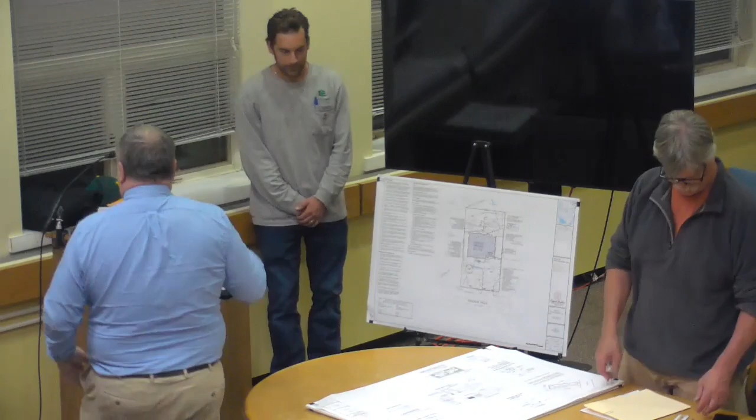Just for the record, I agree with Brian that typically with a larger groundwater problem you will try to keep the sump pump on the outside, because there's a larger risk of failure, and if it fails outside the house, it's better than failing inside. So it would be fair to say that Mr. Muller's design is to mitigate any water that comes to the interior. He's not like number 30 with 2 sump pits out in the backyard. Right. And then the condition would be perpetual water into the ditch or the watercourse.

The way I view the current design, since it's documented that groundwater is below the basement level, it's more of a belt and suspenders design, just in the event that something happens. It's always a good idea to have that. It might never be used; the pump might just rust in place. But in the future for the commission, if the engineer has sump pits on the exterior of the foundation.

We'll know why. Or you can make that assumption. Yeah, some guys put them outside, even in our case, on this property, some guys like them outside. Oh, okay. But that's still a thing to me would be like, hey, let me look at the soil testing then and see how high mottling is too. They may not witness groundwater, but if mottling's only 24 inches below grade, who knows? And water might be that high in January, February. Thank you. Good to know.

So there'll be a footing drain that runs around the outside on top of the footing, right? And it'll pop into the house through the footing somewhere into wherever that sump pit will be. So more than likely, I don't have the foundation plan in front of me, but if they put a mechanical room down there, or if there ends up being a bathroom down there, they'll need a sewage ejector pit to get to the sewer line, because the sewer line's higher than the bottom of the basement.

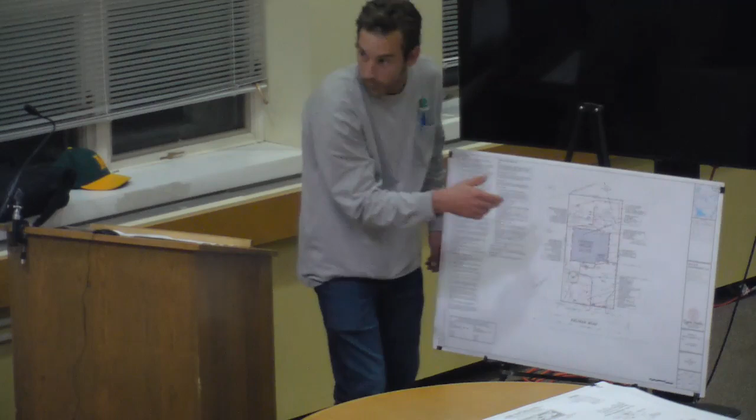So that's where they would put the sump pump, wherever that may be. The footing drains will run all the way around, and then they'll pop through the footing wherever that sump pump hole is in the basement. But we shouldn't see any water going into that pit. That pit should stay dry. That's another reason why I like the pit too, is you don't even need to put a pump in there right now. You can stick the pump in there whenever you want.

I did a house when I first became a PE with my father, and we put a pit down in the basement, and we never saw water in there ever. We just had a pit just to have it. Just in case, yeah.

Okay, Rick, what do you think we should do with this then? Well, there's a number of things. You have an engineer confirming no adverse impact based on the drainage plan that's been provided. There's an extra measure of protection with the sump pump. We've had it independently confirmed based on Joe's testimony. There's an issue, and it sounds like it may be attributed to some other construction.

So I don't know what further they can do here, except maybe further diminish the amount of runoff by things like we talked about tonight. Although I don't like coming up with a design at a meeting, things like the patio. This is the same thing I say about pervious pavement on residential properties. I'm not a big fan because the maintenance requirement is a little too great for the individual homeowner. You have to have the right equipment, you have to vacuum it out, that kind of stuff.